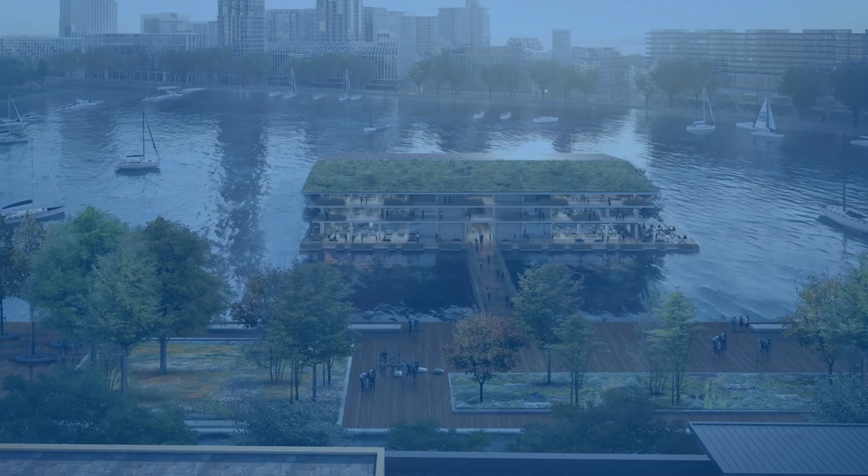How can floating development help adaptation to climate change? My name is Åse Johannesen and I am the Water Adaptation Community Facilitator at the Global Center on Adaptation. The Water Adaptation Community supports the Global Center on Adaptation by bringing together practitioners and experts to accelerate adaptation. And floating development is one way of adapting to sea level rise and flooding. And it's also a way to expand the urban space.

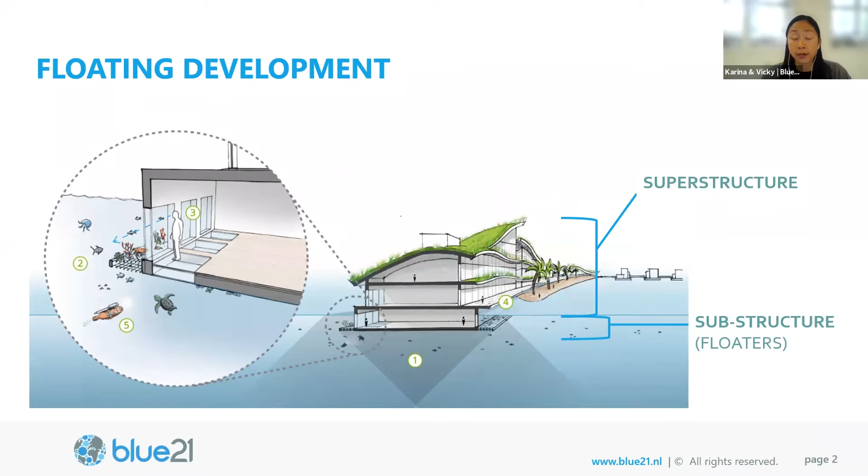It is usually fixed at the bottom of a water body so that it doesn't drift away, but also has the freedom to adapt and move according to changing water levels. Not to be confused with stilted houses or amphibious houses.

So if we look at the critical global challenges for 2050, we can see that most cities still need to be built while facing the projected sea level rise of up to 30 centimeters. This is also confirmed by the newest IPCC AR6 report. And the fact is that 50% of the global population is living within 100 kilometers of the coast, posing a huge threat to the coastal community. How are we going to do this?

And at the same time, if we continue to, for instance, produce and harvest food the way we do, by 2050 we would have a shortage of land the size of North America in order to feed 10 billion. Where are we going to find the space? Most cities resort to the more conventional way of creating space, which is land reclamation. But the reality is that we are running out of sand.

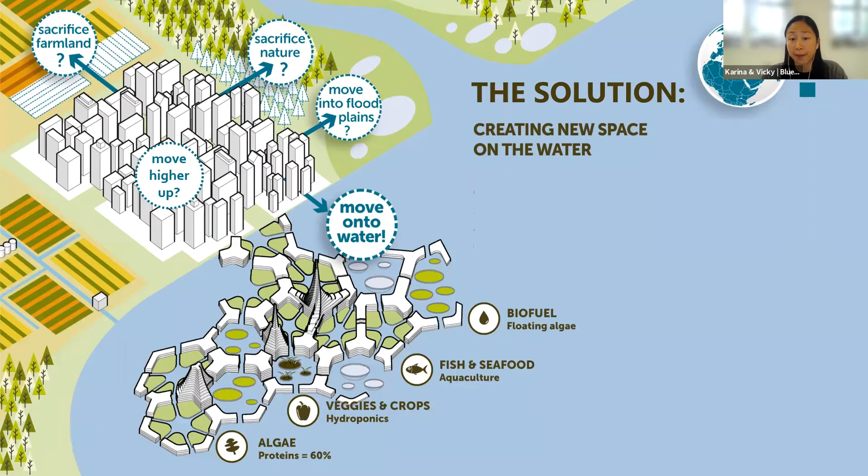There's an alternative solution, which is to create a new space on the water. In fact, a lot of solutions are already available for different applications. And it is possible to create a closed loop and a circular urban metabolism with a floating development. I'll show you some building blocks and some examples from around the world.

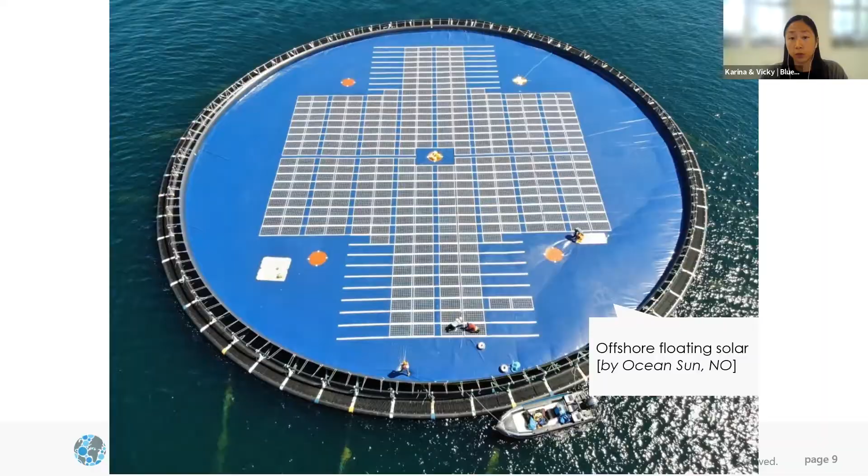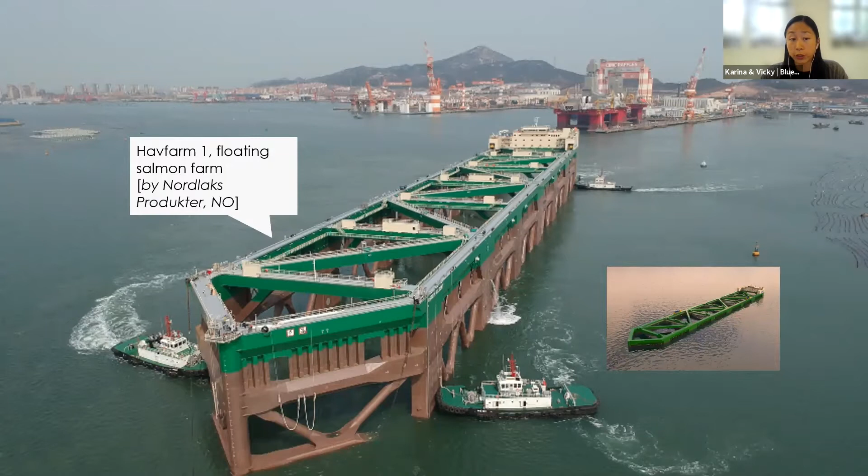Most people are now probably familiar with floating solar, not only for inland applications, but also for offshore. Different designs have been explored, as well as for offshore floating wind, and floating aquaculture at very large scale. A city can actually redevelop and expand its port areas using floating structures, also create public or event space on floating structures, more recreation, and also create affordable housing.

This is an example in the Philippines, taking into account vernacular architecture. But with only one single floating house, we cannot make enough impact. We must create at a community, neighborhood, and even city scale. In Amsterdam, you can also already see a bigger scale of a sustainable floating neighborhood.

In fact, floating community or living on water is nothing new. It can be observed in the past and at present with different technologies implemented. There are also some experts looking further into the future, creating floating development at a city scale, including us. This is one of our recent projects where we work together with our partners Shimizu Corporation and Finest Bay Area development, where we plan to introduce large floating settlements in the Baltic Sea

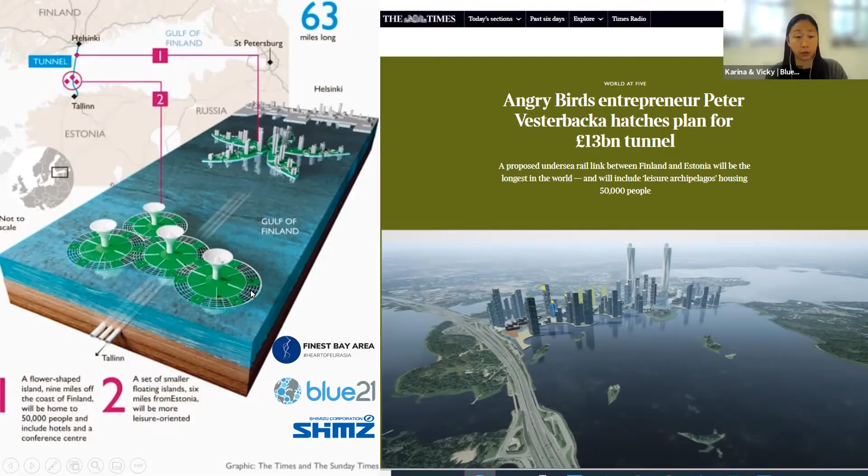around the tunnel initiative. On the left, you can see a mega float city created by Shimizu called Green Float, where they would introduce large floating structures for housing, for recreation, as well as food and energy production. Such a design has already been tested in numerous basin tests, as well as numerical computations. And it's proved that it is technically feasible and even safe, which is often the concern of a lot of people when it comes to living on such a large-scale floating structure.

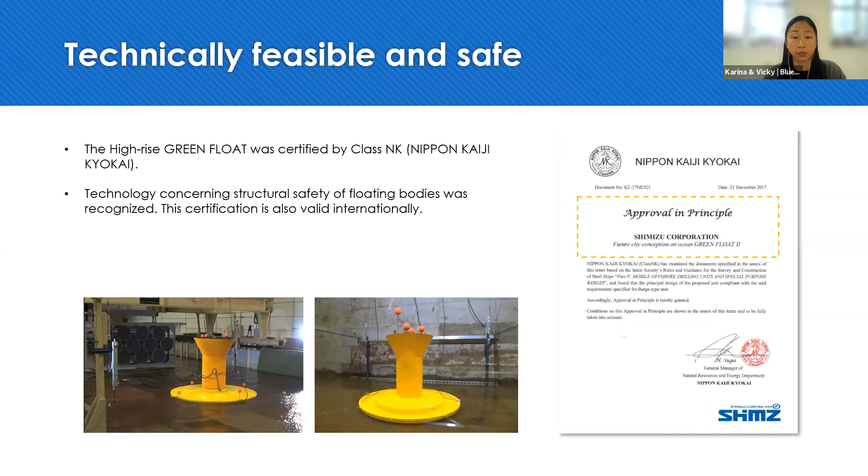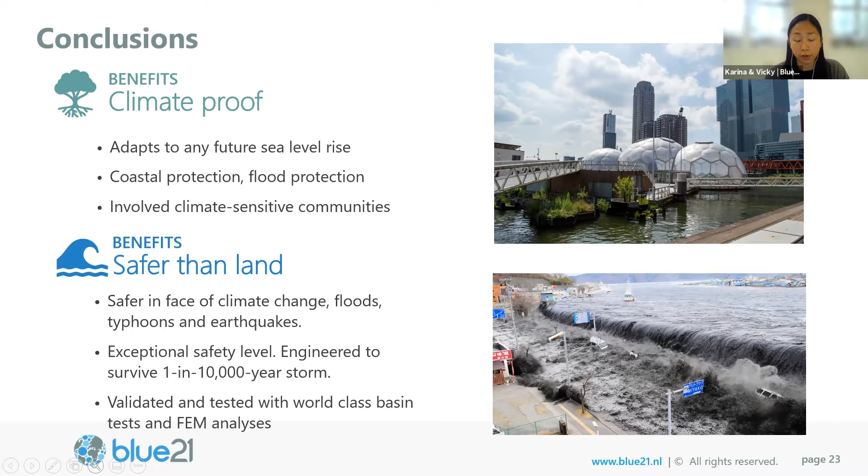In conclusion, floating development is climate-proof and future-proof. It can adapt to any future sea level rise, providing protection for the coast against flooding. It can also be safer than land in the face of climate change and other natural disasters such as typhoons or earthquakes. It can provide exceptional safety levels, and it can be engineered to survive, for instance, 1 in 10,000 year

storms. But not only adaptation, floating cities could also contribute to climate change mitigation, reducing greenhouse gas emissions while achieving numerous UN Sustainable Development Goals.

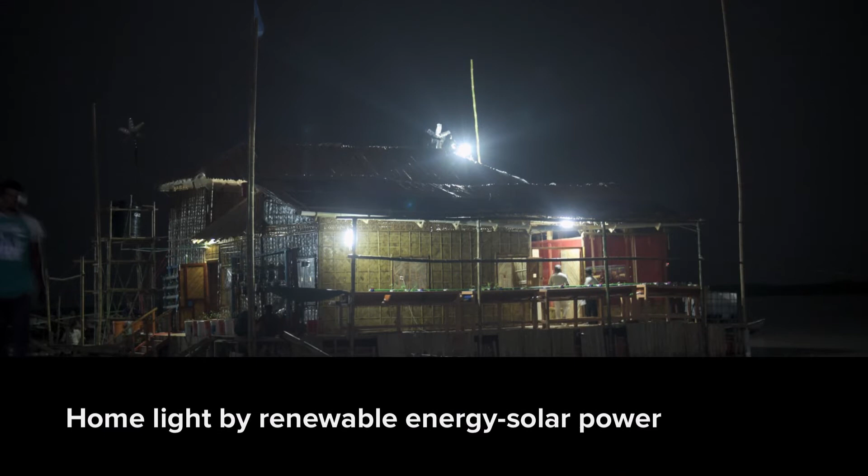The house was fully supplied by renewable electricity sources. A 15,100 watt solar PV panel backed by an innovative technology of solar concentrator, wind turbine, and biogas generated electricity option was also the first of its kind in Bangladesh and other similar countries.

Sustainable livelihood provision was one of the key features of the home. The home is able to generate a standardized income for a family of 6 members, not only during flood, but also during the dry periods, all around the year, from poultry, fish, and vegetable production. The annual income for a family was estimated at $4,500 per capita

GDP of Bangladesh. So in the background poster, you can see the home design; it is the 3D of the flood resilient home that we built in Bangladesh. It is 100% built on bamboo, and the environmental footprint during construction, design, operation and maintenance was based on the principle of net zero.

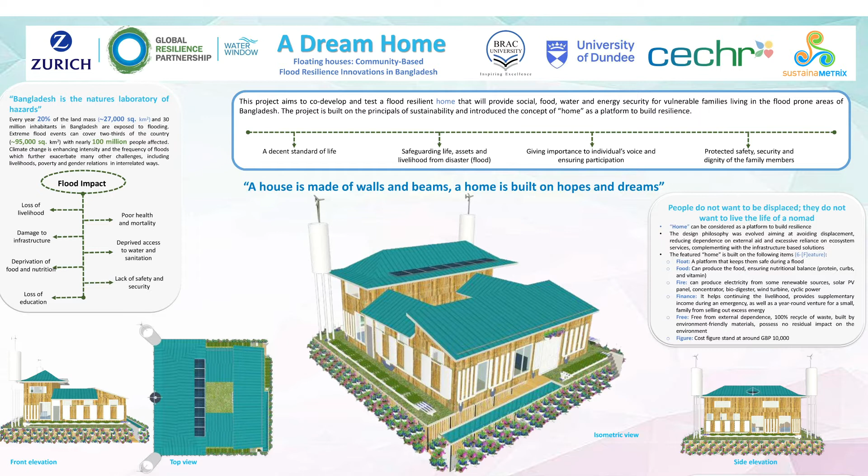The reason why we call it a dream home, not a flood resilient home, is because that's the name the community preferred. It was very much a community driven initiative. We empowered 15 very vulnerable families to join in the process of co-design and co-production. And then they came up with this design of flood resilient home. What we did, we used computer software and designers to make it presentable to the rest of the community.

The major lesson learned from this process was, as I said, it was a technically sound initiative, and the acid test was done because it survived 2 consecutive mega flood seasons. But what happened after 2 years, when people realized that some poor people are getting benefit out of that, then some serious theft incidences were reported from the construction site, despite all the materials being stored securely in 2 separate construction sheds.

We made some police reporting and involved the government administration, and we also employed 5 security guards at the site. But the communities were confused because this is an agriculture-based production system. Benefit doesn't realize fully even after the first year of operation. So the estimated loss from theft and new employment was $2,500, which was also unanticipated from our side. We ran out of budget, and that created a problem.

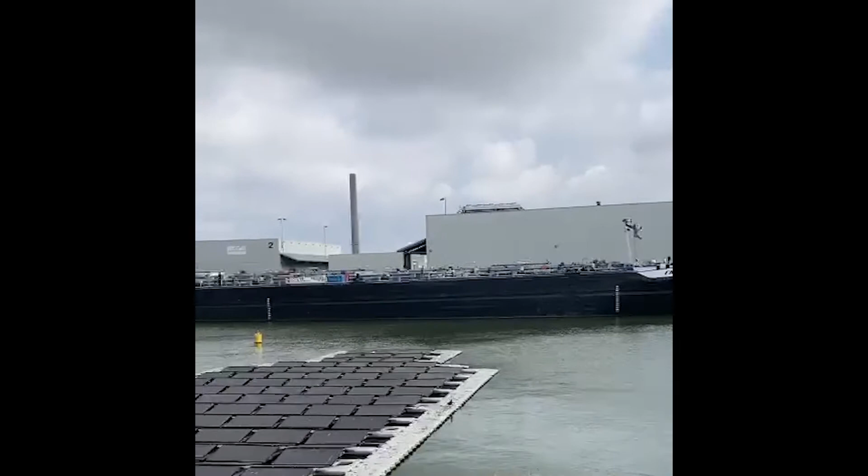Welcome back. Here you see our building completely floating in the port of Rotterdam. You see our solar panels. We collect rainwater that we filter, that goes back as drinking water to our cows. And it's the first one in the world, as I already mentioned.

Now let's start with our goals, our objectives. For us, it's really important to produce healthy food close to consumers. And consumers live inside cities. So where can you find space in the city? Where can you be climate adaptive in the city? Obviously on the water. So here in the port of Rotterdam, we have a tide of 2 meters. So every day we go up and down with 2 meters. And there we can simulate what happens if sea level is rising or more rainfall is coming.

So this is our stable. It's a fully automated stable where we collect all the waste streams and we give it to the cows, as you can see over here. They upgrade it again back into protein and it goes back to the city. Now, as we know, a cow does not give only milk, but it also gives manure. So what do we do with the manure? Because manure is a very important, interesting organic fertilizer for the city. So let's go and see downstairs what we do with the manure.

In our stable, we have a manure robot. It collects the manure and the urine and brings it to this machine. And there we turn it into all kinds of healthy fertilizer that goes back to parks and city plants in the city. For us, a very important part is also the sustainability and the circularity of our farm. We want to be a circular part of new cities. So for instance, we collect all kinds of organic waste streams from the city, bread, grass from sports stadiums, orange peels, that go to our cows, and our cows turn it into protein again that goes back into the city.

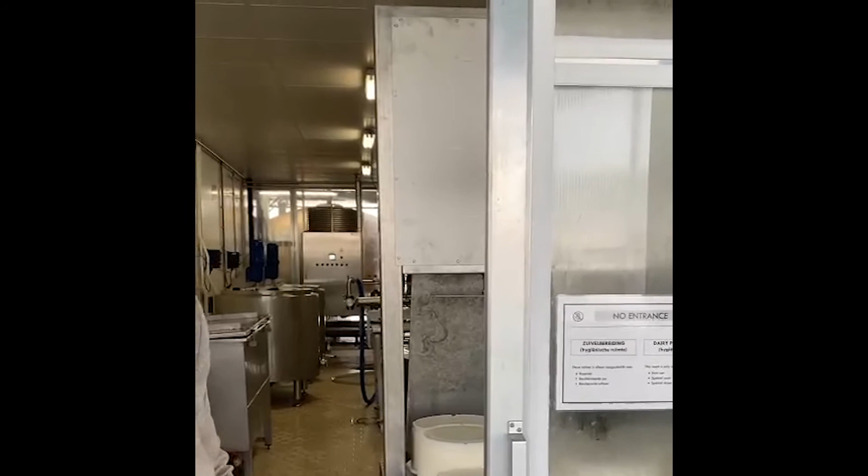So welcome in our store. Here you see all our products that we make every day, completely fresh and pure. So we have our great milk. We have a very hip product from the city, milk with kombucha. We have our buttermilks, we have our yogurts, and obviously we have our own cheeses. Here you see our cheeses.

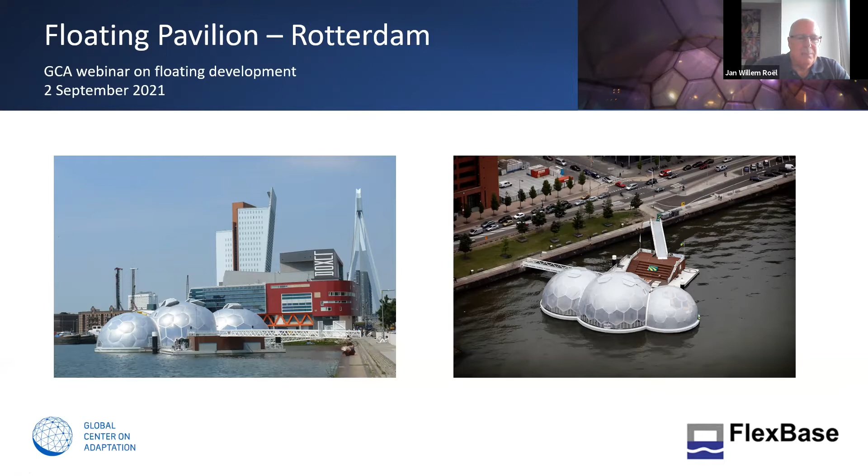My name is Jan-Willem Roël. I'm the founder and CEO of Flexbase in the Netherlands. I'd like to present to you the floating pavilion that was founded about 10 years ago as a center of, let's say, adaptation in the city of Rotterdam. First, I'd like to present a little bit about Flexbase. It was founded about 10 years ago.

At this moment, we have built about 6,000 square meters of floating, and we are at this moment establishing a company in Singapore that's called Flexbase International. The floating concept is a patented one and has to do with EPS and concrete. What is very nice about the system is that it needs hardly any maintenance, it is very long lasting, and it is fully recyclable.

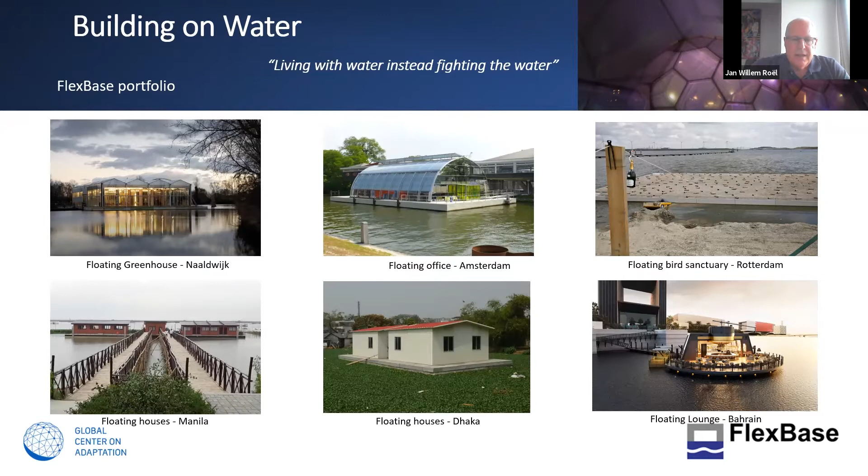But also regarding the cost, it is costing less than a concrete or steel barge at that size. I can show you some of the projects that we've done. A greenhouse in Holland, an office in Amsterdam. We also did a floating house project in Manila. We did an amphibious floating house project in Dhaka. And last but not least, the floating lounge in Bahrain.

To tell you a little bit about the floating pavilion as a start, the client is the municipality of Rotterdam, to show what we should do around climate change. And we had some real requirements. It should be climate proof, minimize the CO2 footprint. We already had in the beginning that it should be domes put on top of it. It would be two structures, the pavilion and the square, in total about 1,400 square meters. We had to put basements into it and a very short construction time because of the Tour de France that will be starting in Rotterdam.

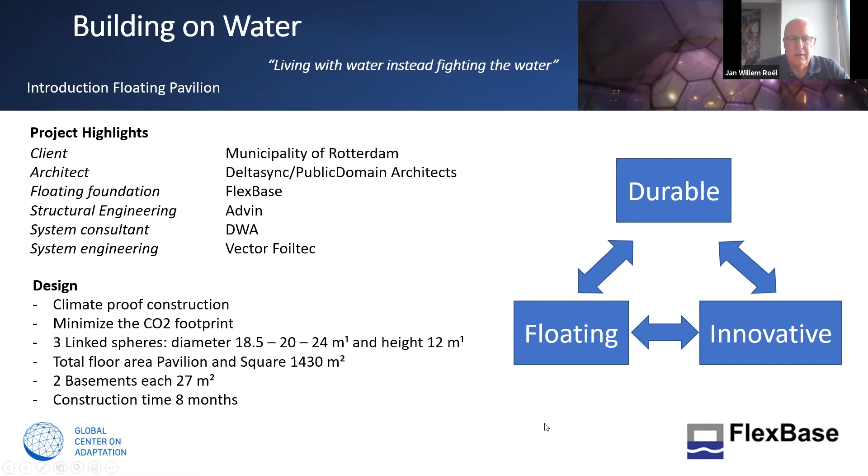So to take you a little bit through the design starting points, it should be soap bubbles on the water. And there should be no more facilities inside. So we looked into how to build it very light, because that has to do with the water. Everything you put on top of it, you have to get buoyancy again. So we worked with a steel sphere. We first started with glass into the steel, but that was far too heavy. So we ended up with ETFE foil, which had already been used at the swimming pool in Beijing, for instance.

We looked very much into the energy efficiency with microclimates in the building. We had a very innovative heating concept that's coming from the greenhouses in Holland. The cooling concept was also rather new, with extracting water from the air. We had a heat recovering system with salts that were getting fluid in the day and giving out the heat in the night. And of course, the very efficient natural ventilation, getting the air from the water surface into the building and getting the warm air out.

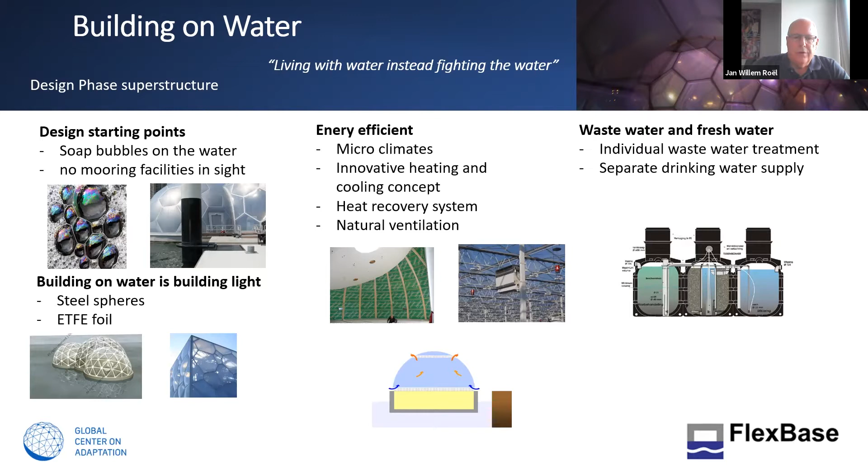Then finally, we did a lot on wastewater and fresh water. We had an individual wastewater system in one of the cellars, and we used that cleaned water as toilet flush water again. The innovative design for us as the float was that it was round, and that was very special. Then we had to bring in the compartments for the cellars, as you see in the middle picture. But also we built it in another location, then it was finally put in place.

Regarding engineering, we had a lot of issues regarding how to engineer, to what codes. We had to deal with stability and tilting, buoyancy, of course. Then also, because we're building on water, we have to look into the manufacturing process, because a lot of loads are getting onto the structure while pouring, for instance, the concrete. We had to deal with the waves and the water current, because we have a tide difference of about 3 to 3.5 meters at that location. We had some marine requirements, of course. One of them is the bridges, because we needed 2 bridges regarding safety requirements.

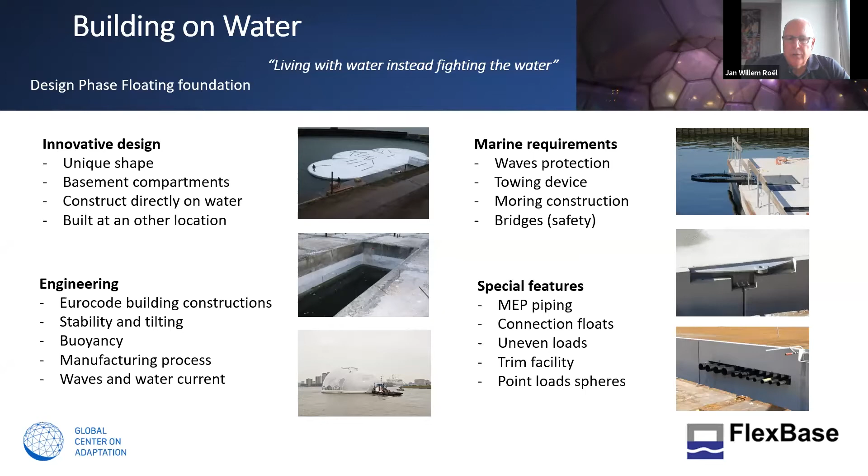And a very special feature regarding MEP piping that were all in the floating constructions. We had to get very special connections, because we could not moor the floating pavilion with poles. So we had to develop something else. We had very uneven loads, because inside the spheres we had a conference room. We had to deal with trim facilities regarding the flexibility of the total structure. And also we needed all the point loads to be taken from the spheres.

So to take you a little bit through the building process of the float, you see here we started on the water with plates and later on also with blocks. The total thickness of the EPS was about 2 meters, 2.1 meters. And then we put some concrete beams into it, as you see in the top right picture. And finally, we put also the side slabs to protect the EPS from collision. The floor is about 20 centimeters. On top of it, the steel structure was built for the domes, and then it was covered with ETFE foil. That was all done at the building location, and after that, it was brought to its final location, the Rijnhaven in Rotterdam.

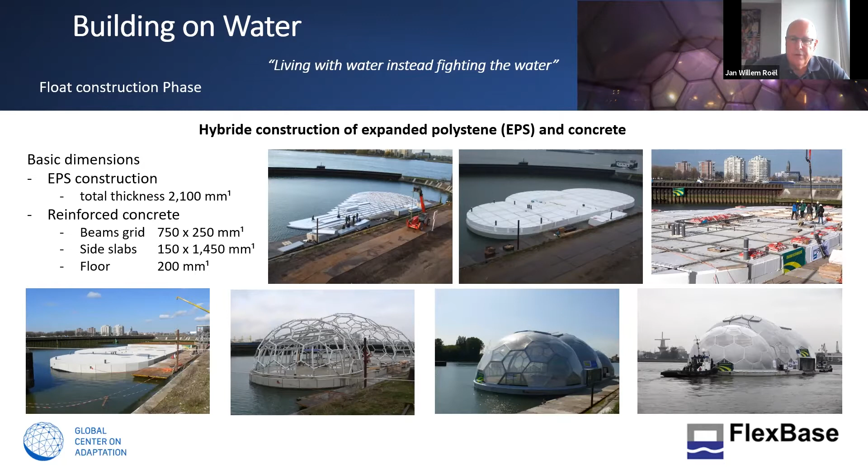Really, Rotterdam wanted to expose itself as the city that was dealing with climate change. They wanted to show that we could really build something that can be adapted to the water level rise. A lot of new ideas and inventions were presented in these domes. Living with water is really, really better than fighting the water.

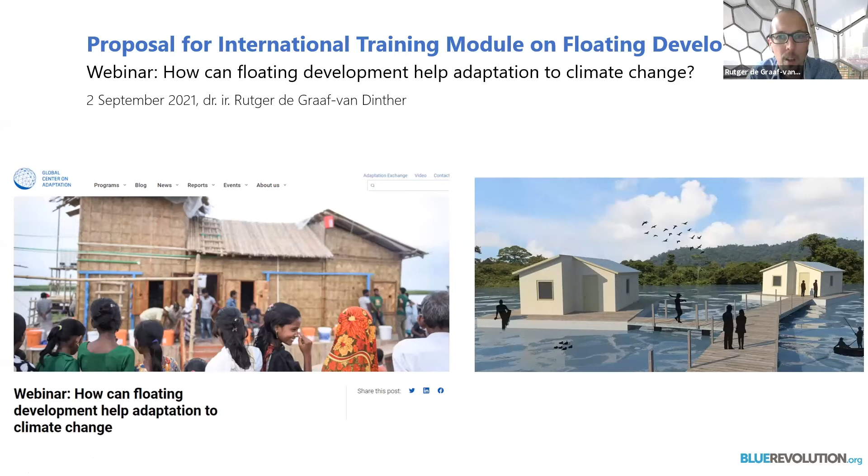Good afternoon. My name is Rutger de Graaf-van Dinther. I will be talking about a proposal for an international training module on floating development. A little bit of introduction about myself. My mission is to enable climate-proof floating development with a positive social and ecological impact. I've been working on this for the past 15 years in different roles, as chairman and co-founder of the Blue Revolution Foundation, but also as director and co-founder of different companies involved in floating projects.

I'm also the co-initiator of the Floating Pavilion Rotterdam, a very interesting project, of which we heard already a lot today. I was involved in the Second World Conference on Floating Solutions as keynote speaker and co-chair. I'm also the editor of the book Climate Resilient Urban Areas, published by Palgrave Macmillan. And one of the chapters, the 5 pillars of climate resilience, I wrote together with Henk Ovink, the national envoy on water management of the Kingdom of the Netherlands. And I'm also co-initiator of the National Research Initiative Floating Future, together with the Maritime Research Institute Netherlands. So it's not surprising to you that I'm very interested in floating urban development.

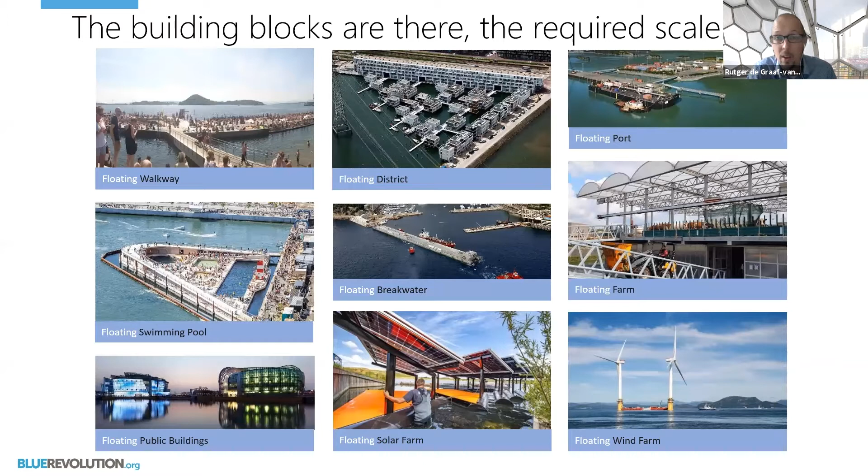So why have we proposed an international training module on floating developments? We have noticed that floating developments can have global potential to contribute to climate-proof living space and support urgent urban transformation to resilience. However, we also see that current projects are still quite small in scale. If you compare them to the scale of the climate threat of our cities, this required scale is still lacking. So we think that awareness and knowledge about floating developments need to be strengthened globally to enable wider application of this technology. As also shown in previous presentations today, the building blocks and technology are there, but we need to increase the scale of these applications.

One way to look at this is the framework of receptivity. Receptivity is a theoretical scientific framework that I also used in my PhD. And it's about the extent to which there not only exists a willingness, but also an ability among stakeholders to absorb, accept, and utilize innovation options. And there are 4 components or attributes of this receptivity framework: awareness, association, acquisition, and application. Awareness is really about the stakeholder sense of urgency, and also that the status quo is no longer sufficient and that there are alternative options.

Association is the ability of stakeholders to link floating developments to their own agenda, objectives, and interests. Acquisition is the ability of stakeholders to plan, design, engineer, implement, but also operate and maintain floating developments. And application is the ability to have sufficient legal and financial incentives to really apply these innovation options, floating options, in practice. So all of these 4 components need to be in place really to support behavioral change and implementation of floating urban development. There are already capacity building initiatives going on.

Today, our webinar really aims to contribute to strengthening awareness. Also, innovative pilot projects such as the Floating Pavilion have that purpose. On the association level, for instance, on the international policy level, we have noticed the UN high-level roundtable on floating cities, which took place 2 years ago. More locally, we have started the think tank Governance of Floating Cities. Research programs such as Space at Sea and also the National Research Initiative Floating Future aim to strengthen the capacity and knowledge of stakeholders. Also conferences such as Paving the Waves have that objective.

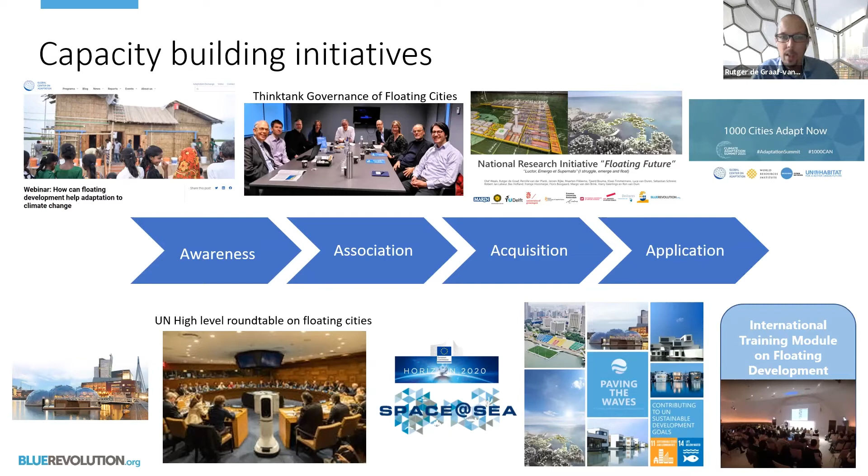And the 1000 Cities Adapt Now program, global programs really aim at increasing also the application of these kinds of adaptation options. And with our international training module, we also aim to have a contribution to this objective. So these are some of the initiatives already in place to strengthen the receptivity of stakeholders for floating urban development.

I want to stress that there's a need for an interdisciplinary approach. It's not only about technology, but the social impact and ecological impact are just as important, as well as not only talking about science and research, but also about application and practice. So we really need an action research approach where we study and implement at the same time, because we don't have time to study forever if we consider the urgency of climate adaptation challenges in cities worldwide.

So this is our draft structure of our training module. Lectures will be given by the leading experts from the World Conference on Floating Solutions 2020. And the themes include socio-economic aspects and governance, design and technology, and ecology and water quality. So that's the lectures part.

And we also have interactive workshops: governance and planning, organized by me; technology of floating and amphibious structures, organized by Jelle Vedder and Jan Willem Roël; and food and energy by Peter van Wingerden and Vicky Lin.

The objective is to increase awareness and knowledge of floating urban development as an option, so not the option, but an option, to increase climate resilience among city policymakers, professionals, and planners, and to do this globally. Also to strengthen the international knowledge network for climate resilient floating developments. The platform will most likely be digital. The duration will be 1 day, and we're looking at a group size of about 15 to 30 people.